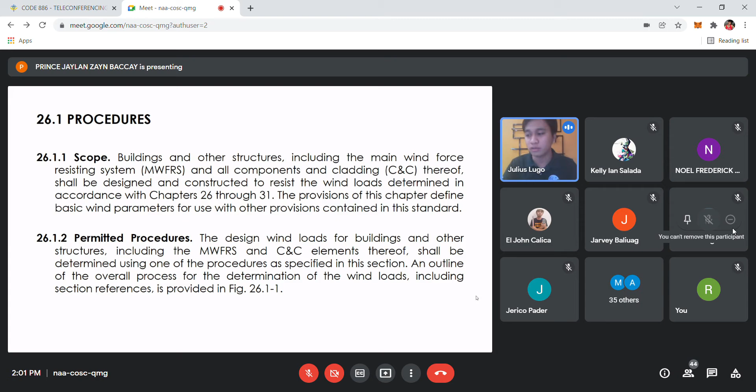So that will be discussed in chapters 26 through 31. So ganun kadami guys, 6 chapters ng ASCE wind loads. So what are the permitted procedures? The design of the wind loads for buildings and other structures, including the MWFRS and C&C, those are the abbreviations, guys, shall be determined using the procedures specified in this section. The general requirements will be discussed in chapter 26, but the specifics of the design will be discussed in chapter 27 hanggang 31. Next slide tayo.

What are the procedures in determining the wind loads for MWFRS? We have actually 4 types of procedure. The first one is directional procedure. Second one is the envelope procedure, and then directional procedure for building appurtenances, and wind tunnel procedure naman for all buildings if it does not fall among the first three that I mentioned. The directional procedure is actually dependent on the height. Actually, lahat naman sila dependent on the height. The directional procedure will be thoroughly discussed in chapter 27, for buildings meeting the requirements specified therein.

And then we have the envelope procedure. This is for low-rise buildings lang. And then we have directional procedure for building appurtenances, or rooftop structures and rooftop equipment and other structures. So the first procedure actually deals with high-rise buildings, the second one, low-rise. The third one is those located on the roof decks. Iba ang analysis nun kasi it's not part of the MWFRS as a whole.

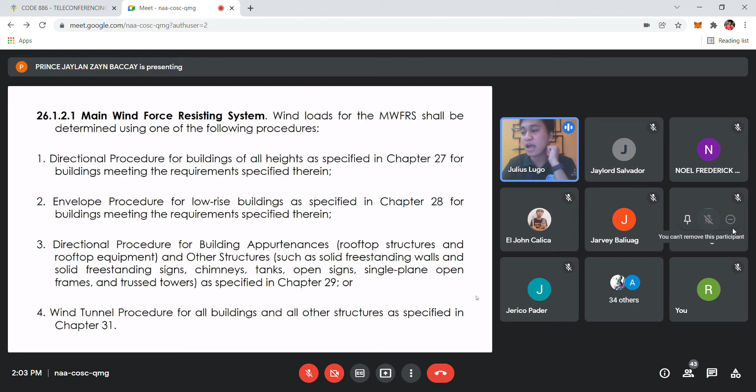For components and cladding naman, next slide tayo, please. Okay. So, for components and cladding, we have two general procedures that we need to do. We have the analytical procedure and wind tunnel procedure naman. But we will not be focusing on the components and cladding. We will just be focusing on the MWFRS.

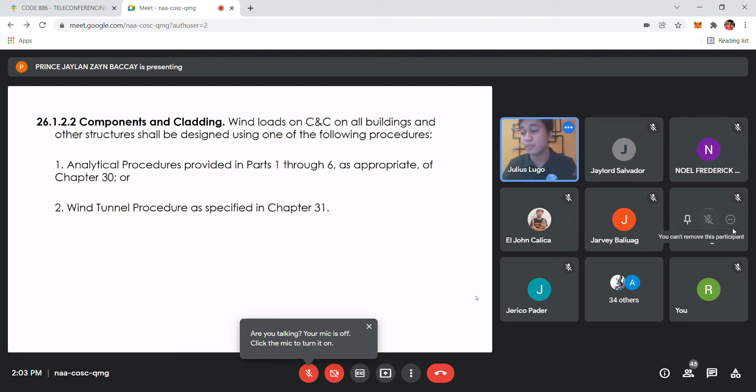Okay, so the first one is analytical procedure, which will be tackled sa chapter 30. Pero hindi na tayo aabot doon kasi we're just focusing on the general requirements. Sobrang dami kasi yun. And then second one is the wind tunnel procedure. Okay. So next slide will be the definitions.

Okay, so I'll just leave that to you kasi sobrang dami ng definitions dito, guys. It is important for you to know the definitions, because upon reaching the general requirements in each section, baka ma-confuse kayo kung ano yung ibig niyang sabihin. So it is required for you to read and understand what these definitions are.

For example, do you know that the definition of a low-rise building depends on the mean roof height? So for building at low-rise, dapat yung mean roof height niya is less than or equal to 18 meters. So the average height of the roof should be 18 meters. That is your low-rise building.

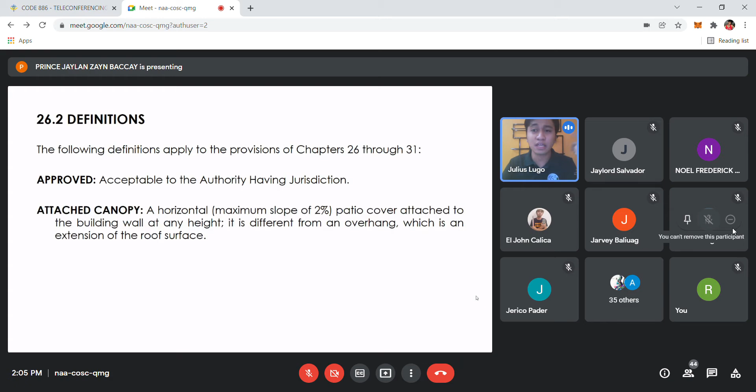And another one is that yung mean roof height mo does not exceed least horizontal dimension. So dapat hindi siya bumaba sa minimum stated by the code, the standard. So, yun yung mga definitions natin. Meron din tayong mga open building, partially enclosed na building, and enclosed. It's up to you na to read that one. Pero nandun na lang yung definition.

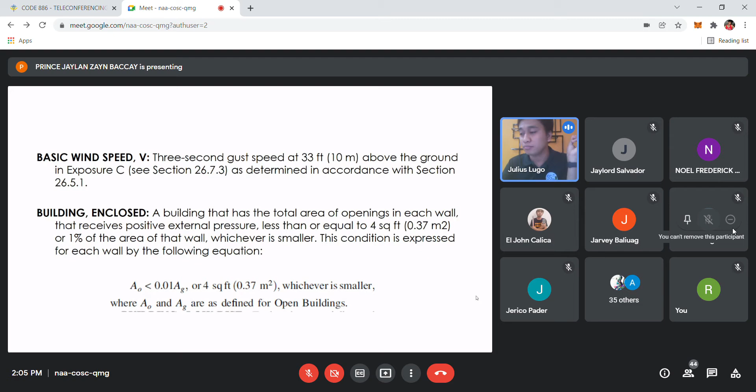What do we mean when we say open building? So, a certain percentage of the building is actually open. It depends on the number or the area of the windows. So, yun yung ating mga definitions. Meron tayo dyan, basic wind speed. Ano ba tong basic wind speed na to? And then building enclosed. So, it's up to you to read that one later on. I will just be talking about the sections na lang.

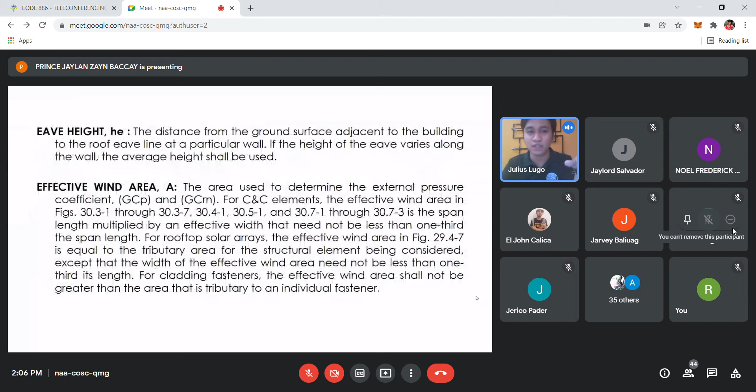So, next chapter po tayo. Hanapin natin yung figure. Ayan, dyan tayo magstay. Balik tayo doon sa may figure. So, this will be the flow of the wind load in general. Chapter 26 of the ASCE talks about the standard values and variables.

Now, for the analysis, Chapter 27, 28, 29, and 31 are actually talking about the procedure on how you're going to apply the wind load. Pero hindi na natin yan gagawin, kasi si STAAD na or yung software na natin ang gagawa niyan. So yung first column on your left side, that's the procedures for the MWFRS. We have 4. And then chapter 30 and 31 naman will be the procedure for components and cladding, the C&C. So yan yung outline ng process natin for determining the wind loads.

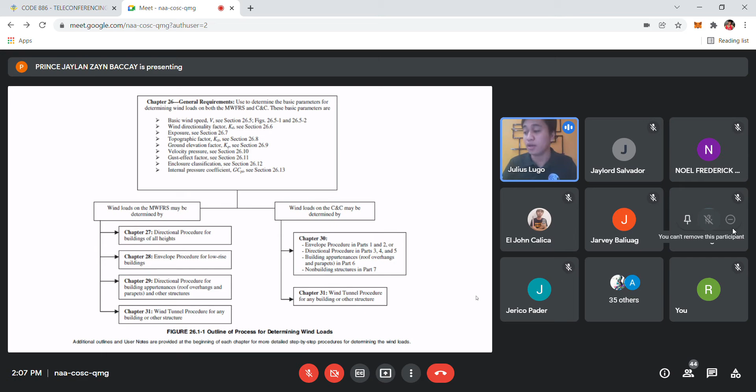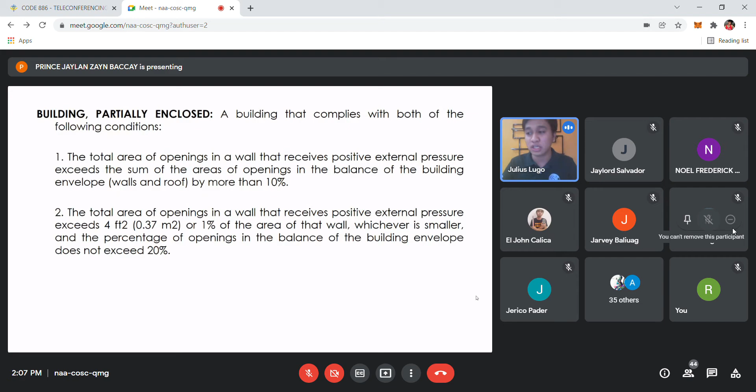Okay, proceed tayo sa 26.4, general. Hanapin mo lang yung general. Sige, baba ka pa. Lagpasan na natin yung mga yan. Balik ka. Ayan. So, ito yung general natin.

General requirements. So for the sign convention, if the pressure of the wind is acting towards the object, it is positive. If it acts away from the object, it is negative. And then critical load condition natin, values of external and internal pressure shall be combined algebraically. So you just need to get the summation of the pressure. Apply lang statics dyan, guys, to get the critical load condition.

If both of them act in the same direction, di ba, you add them. Pero if they are opposing forces, you subtract them. So that's what we call the process of algebraic determination, okay?

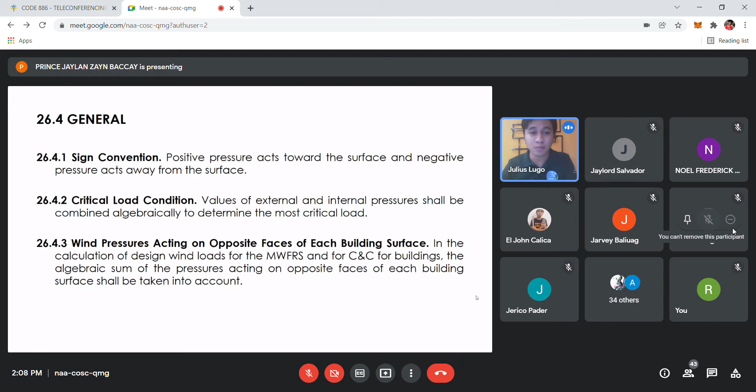Next, we have wind pressures acting on, sige. Sabagay, pareho lang din naman yun, guys, okay? So, doon sa 26.4.3, wind pressures acting on opposite faces, yun lang din yun, okay? You just need to get the algebraic sum, okay? So, proceed tayo doon sa wind hazard map.

So, ano ba itong wind hazard map na ito? Actually, we have that as well. So, dito sa wind hazard map, it is actually a map, literally. It just tells you the average wind speed at that particular area, using parang contour lines, guys, okay? Later on, meron tayong sample niyan. I think next slides will have the example.

Pero dito sa basic wind speed, how do we determine this one? So for basic wind speed, guys, that's the V. Tandaan, basic wind speed is the V. We use this in the determination of the wind load and other structures. We can identify these using figures 26.5-1 and 26.5-2, and then to identify as well the risk category of the building, okay.

So if your structure is under risk category 1, you use figure 26.5-1A and 26.5-2A. Now, similarly, if it is under category 2, you use 26.5-1B and 26.5-2B, and so on and so forth. So the values of your basic wind speed depend on the risk category, okay? And the wind shall be assumed to come from any horizontal direction.

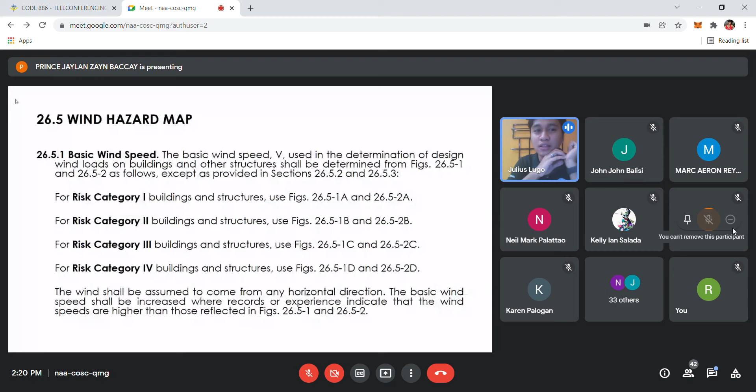Earlier, I mentioned that the values of the wind speed, the V, is actually taken from the code, or given by the code. But in this instance, because of climate changes and changes in environmental phenomena, the basic wind speed is not standard. It can go higher, it can go lower. So what are we going to do? We need to consult the experts, the regional climatic data, for example PAGASA, to check on the basic wind speeds of that particular place.

For example, with Yolanda, we only had signal number 4. But because of what happened with hurricanes, wind speeds became above normal, above our standard of 250 kilometers per hour - even more than that. I'm not totally sure, but because of that, we had changes in the code. They increased the values of our wind speeds, including the gust factors.

We also have mountainous terrain. The basic wind speed for mountainous terrains, gorges, and special wind regions shown in figure 26.5-1 shall be examined for unusual wind conditions. So if your place has a value for wind speed, it doesn't mean that's your actual wind speed at that particular area, especially if you are in mountainous terrain.

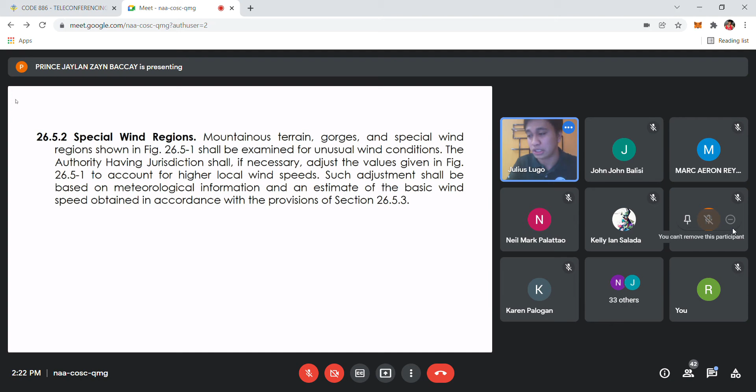Next, we have estimation of basic wind speeds from regional climatic data. This is what I mentioned before - that the wind speeds actually depend on your design and the updates. So we have modifications or estimation of the basic wind speeds.

These are necessary first when approved extreme value statistical analysis procedures have been used in reducing the data. So we are not the ones who do the estimation of basic wind speeds - that's the bottom line here. We don't do that, unless you are a wind engineer specializing in wind engineering.

Another point is the estimation is acceptable if the length of record or sampling error, averaging time, anemometer height, data quality, and terrain exposure of anemometer have been taken into account. Of course, we will do experiments in the field, especially if you are in a mountain. You can't just use one anemometer - there will be sampling points, a lot of sampling points. The more sample points you have, the more accurate the data is. So those are the two conditions in estimation of basic wind speed.

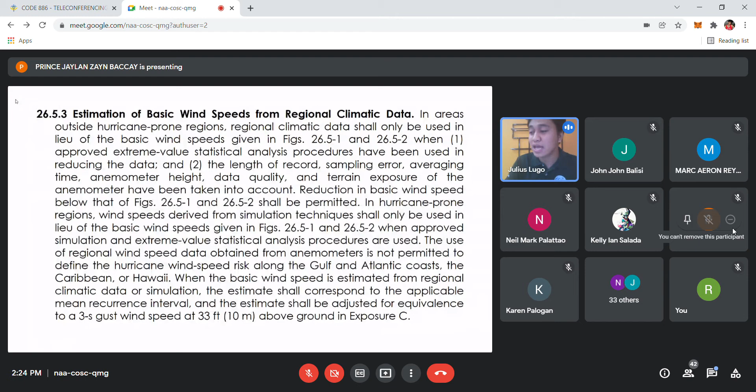Next, this is now the climatic wind map. As you can see, we have curves there, and those curves actually tell you the average wind speed at that area. I think this is Alaska, and this is the east coast of USA. Since we're using the ASCE standard, we may not relate to that directly, but we also have a wind map in the NSCP.

We don't have it because the problem at our school is they don't have an NSCP e-file. And it's sold, worth about 2,000 pesos, and they can't even provide us with the authentic copy. That's why we use ASCE.

Anyway, the curves there indicate uniform wind speed along that path. So if your place falls on that curve, that is your wind speed. But what if your location falls between two separate contour lines? Let's just call them contour lines - it's similar to your topographic map.

So if it falls between two contours, do we get the average of the two, and that becomes your wind speed? Highest, sir? Yes - we need to choose between the two, whichever is the highest. We don't do averaging, rather we choose the highest one, if it is between those two contour lines.

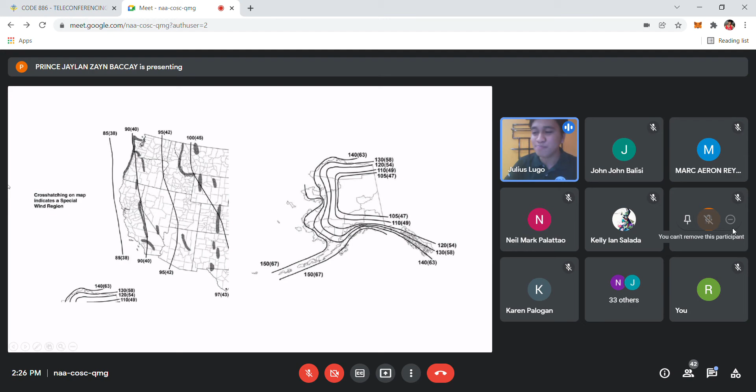There are notes on the next slide about the wind map. So, next slide, dear Prince. Those are the notes - read them later on.

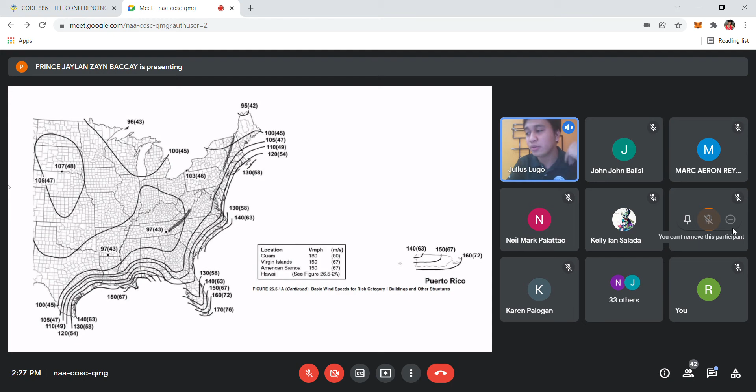So next, we have the wind directionality factor. The wind directionality factor takes into consideration the direction of the wind. Is it from the east side, the west side, the northern side, or the southern side, or is it on the facade of the building? Is it at the rear portion of the building? We need to take into consideration the wind direction.

So these are the wind directionality factors. We have KD, and then we have the building or the structure type. Since no one is probably going to design an arched roof or circular dome here, let's just stick to the box type building.

So what we're going to use as the directionality factor is 0.85, because we are doing MWFRS analysis. We won't be doing components and cladding. So 0.85 for us. Now, your directionality factor can be 0.95.

Those are only for round or octagonal structures with non-axis symmetric structural systems. When we say non-axis symmetric, it's not the same on both sides. If you're going to cut the structure into two, are they the same structural system? Are they the same shape? Do they have the same structural characteristics whatsoever?

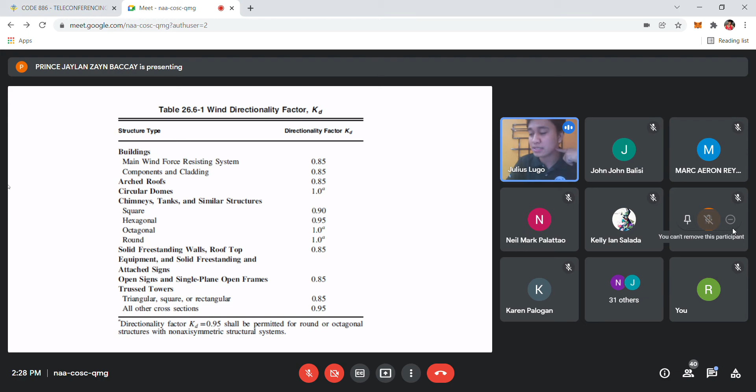So proceed to the next slide. So we have the wind directionality. The wind directionality factor, KD, shall be determined from Table 26.6-1. I think that's the table from earlier, and shall be included in the wind loads calculated in chapters 27 to 30.

And the effect of wind directionality in determining wind loads in accordance with chapter 31 shall be based on... in accordance with chapter 31. But we won't be reaching chapter 31. Okay, next.

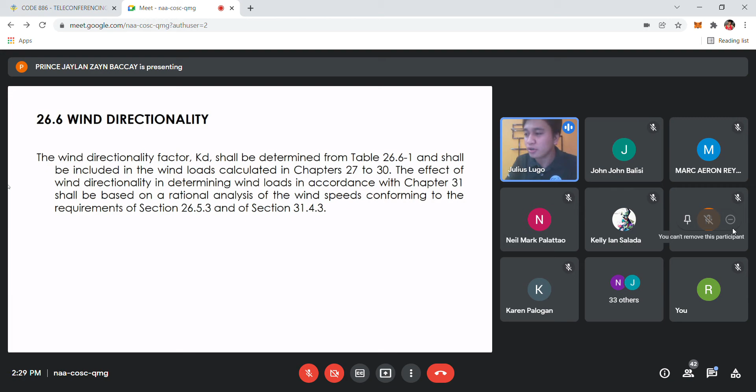Exposure. So we have exposure as well. What do we mean when we say exposure? Of course, we cannot just consider the direction of the wind, but rather we need to consider how close the building is, since structures around the building have an effect. They obstruct the wind path. That's why we have exposure sections here.

So for each wind direction considered, the upwind exposure shall be based on ground surface roughness that is determined from natural topography, vegetation, and constructed facilities. So that is your exposure.

Now your wind directions and sectors for each selected wind direction at which the wind loads are to be determined, it is up to you guys. And in the analysis later on, front, back, and the opposite side, that's what we'll consider as our wind direction.

Now we need to consider upwind sectors extending 45 degrees on either side of the selected direction. Of course, in the case of horizontal, the assumption is horizontal. But we need also to consider at least 45 degrees from the horizontal wind directions. Normally, the assumption for wind is just a single gust in a straight line, but it's not, because when it actually blows, a gust of wind goes in different directions. That's why instead of just horizontal, we also consider 45 degrees upward and downward from the horizontal. So that's the basic scheme of our analysis for the wind directions.

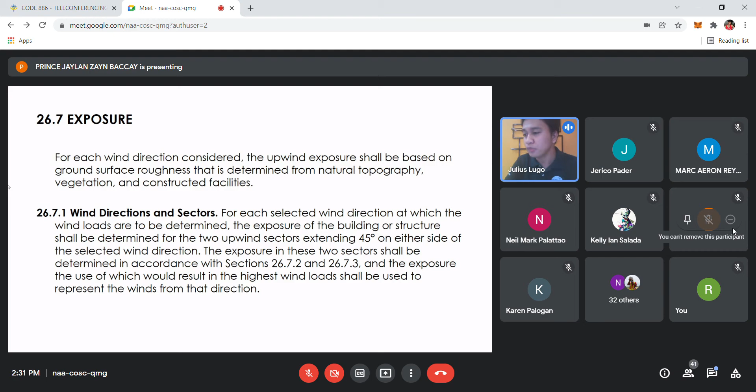So we have exposure types later on, but right now we're going to consider surface roughness categories. What are these surface roughness categories? From the word itself, it's surface roughness, kind of textural - on a massive scale it's textural because we're considering the obstructions. So we have different types of surface roughness here.

We have surface roughness B, C, and D. We don't have surface roughness A. For surface roughness B, just identify all surfaces or places that are urban and suburban areas, wooded areas, or other terrain with numerous closely spaced obstructions. That is surface roughness B.

For surface roughness C, these are open terrains, but they also have obstructions, generally averaging less than 9.1 meters. That's surface roughness C.

Now for surface roughness D, these are flat and unobstructed areas. Normally in our profession, we use surface roughness D because it's more conservative in terms of the design. Where do we find surface roughness D? Well guys, fun fact - normally it's our coastal constructions.

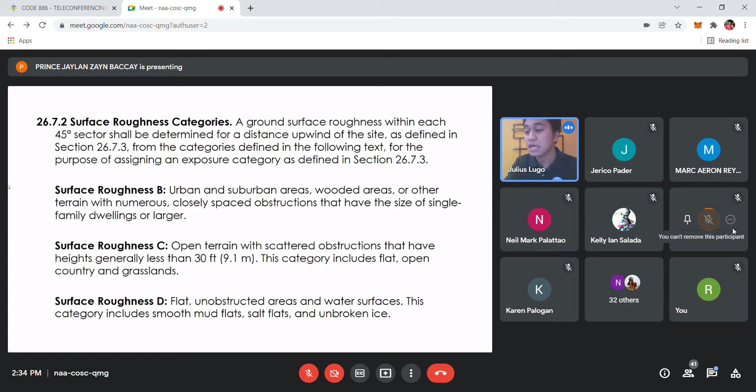Next, we have 26.7.3. Next slide po. These are the exposure categories. Actually, yung exposure C dyan, guys, or yung exposure B dun sa baba, kadugtong niya yan nung under sa exposure C. So, i-edit ko na lang yan later on and i-upload ko na lang.

Okay? So, for exposure B, for buildings or other structures with a mean roof height less than or equal to 30 feet, exposure B shall apply where the ground surface roughness as defined by surface roughness B prevails in the upwind direction for a distance greater than 1,500 feet or 457 meters. Okay.

Now, exposure B actually can be used, okay, ito na yung exposure categories. Kasi kanina yung na-discuss is the surface roughness categories. Now, the exposure will depend on the surface roughness. Okay, so if your surface roughness is under category B, you should use exposure B.

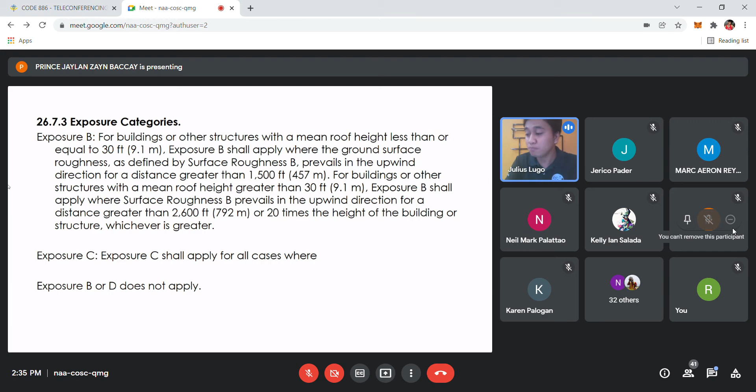Okay, wherein exposure C naman applies for all cases where exposure B and D does not apply. Okay? So, to simplify, exposure C applies only to surface roughness categories under C. So, surface roughness B will just be paired with exposure B, and then surface roughness C will just be paired with exposure C. Okay? So, yun yung mga exposures natin.

So, next one will be exposure D. Ano ba yung exposure D in here? Sabi dito, exposure D shall apply where the ground surface roughness as defined by surface roughness D naman. Kumbaga, the surface roughness is paired with their corresponding exposure. So, B is to B, C is to C, and then D is to D.

So yan lang naman yung idea behind the exposures. So whatever is your surface roughness, that will be the exposure. Surface roughness B, that's exposure B. Surface roughness C will just be under exposure C, and then roughness D will just be under exposure D. Okay, so yun yung ating exposure requirements. Wherein meron tayong exemption naman.

Okay, so an intermediate exposure between the preceding categories is permitted in a transition zone, provided that it is determined by a rational analysis method defined in recognized literature. So that's the only exception. So what if the categories under exposures are borderline? Kumbaga in between exposures and roughness lang sila. Which rarely happens in practice.

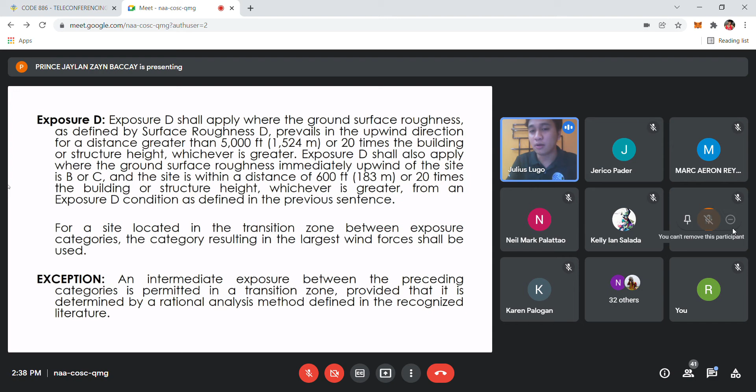So ang ginagawa is that there will be further studies based on published literature, and that's not under the control of the engineer anymore, but rather it will be under the guidance of the agency concerned with the climatic data. So yun yung exemption natin doon. So ang final say will be the agency concerned. Okay. So next we have the exposure requirements.

Good. Alam mo, iniisip ko yung substi na yan. Okay, medyo na-distract ako dun sa substi.

So we have exposure requirements as well. So directional, we have the 4 procedures again. What are the 4 procedures earlier for the MWFRS system? Do you still remember? Okay, let's try to call someone. Si Jarvey. Jarvey, do you still remember the 4 procedures involved in the analysis of the wind load for MWFRS system?

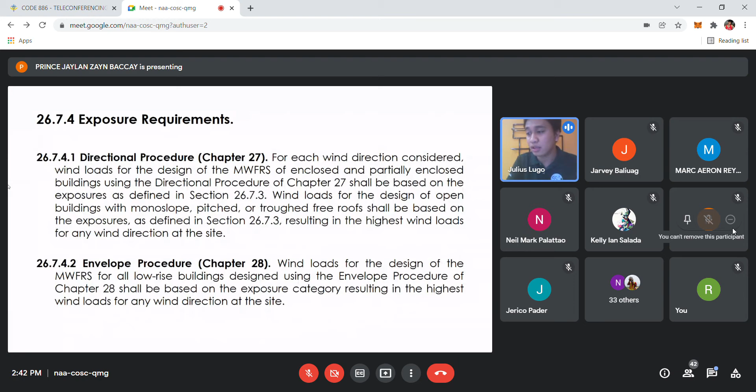Now in the next slide, it says for directional procedure for building appurtenances, yung ating exposure will depend on the appropriate exposure for each wind direction considered. So yung first two kanina, regardless of the direction, you have to choose kung ano yung magandang exposure. Sa first procedure, directional, yung sections ng 26.7.3 yung gagamitin. Sa envelope procedure, whichever gives the highest value, in general, whichever direction it is, yun yung gagamitin.

Now, in directional procedure, you have to consider the direction of the wind. So, it depends on each particular face, kunyari four-sided yung building mo. Mag-base ka sa 26.7.3 pero yung application ng loading will be in each face. So, yung mga exposures kanina, isa lang siya. Yung first two will be in general. Pero ito, whichever is more appropriate in that particular face depending on the wind direction, yun yung gagamitin mo.

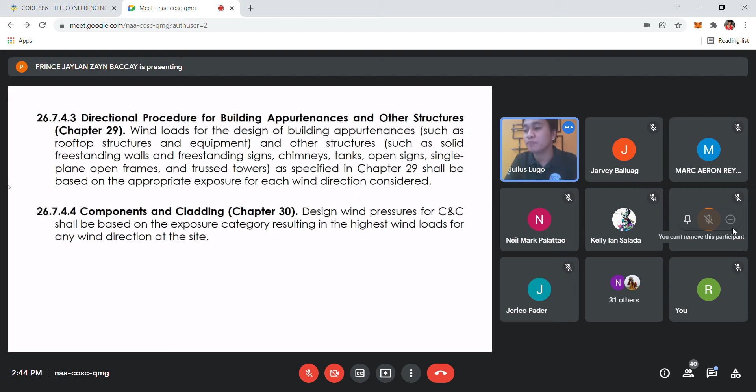So, sa components and cladding naman, that will just be similar to the second procedure, pero C&C na siya. Similar lang siya sa envelope procedure. Pero yung second procedure kanina, that's for the MWFRS lang. Ito, components and cladding naman, whichever exposure type and roughness type will give you the most critical loading, yun yung gagamitin. Next, we have topographic effects.

Wait lang, pwede bang uminom muna? Inom muna ako, nag-dry yung lalamunan ko. So, wait lang guys. Ayan. And can I take a moment to go to the bathroom? Bathroom break lang ako saglit.

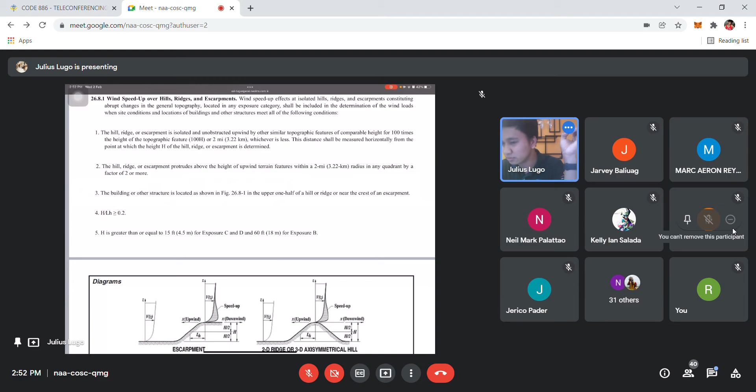Oh, by the way, meron palang figure dito. Let me stop broadcasting. Meron palang figure dyan, sorry. Meron tayong figure doon, Prince. Pwedeng pa-share ako ulit. It's in the next slide pala. Prince, pa-share na lang ako nung screen mo. Ayan, thank you.

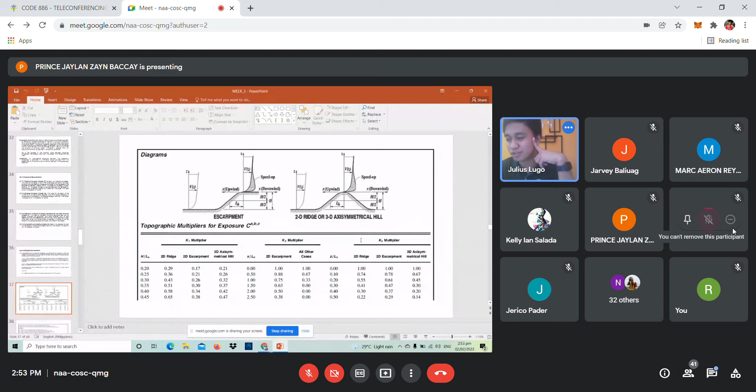Yung instructor sa foundation engineering, ano ba yan? 3 lang tayo kasi hindi tayo nag-discuss ng first week, di ba? So wala pa pala kayong instructor. Oh my God. Paano yan? Midterm na lang kayo mag-start mag-discuss. Diyos ko. Tagal kasi mag-approve ng HR, tsaka VP admin.

So, meron tayo dito, escarpment na tinatawag. As you can see, that is your escarpment on the left side, and then yung ridge naman natin is this one. Yung escarpment natin, elevated siya and then continuous na yung kanyang level. Pero yung ridge or hill, parang nagbukol siya, and then there is a change in slope and then it goes back to the original level.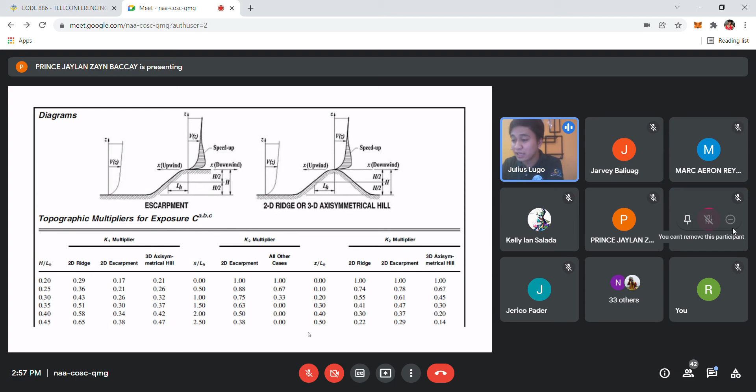Now, ito yung multiplier natin, K1, K2, mga ganyan, okay? So, check nyo lang later on, that is tabular in nature naman. Now, on the next slide, meron tayong additional reminders. So, meron tayo dito for values of H over LH, mga ganyan. Kung wala doon sa table, you can do a linear interpolation.

Do you guys know how to do a linear interpolation? No? Okay. If you are given two values and you're looking for a value in between those two values, pwede tayong gumawa ng algebraic expression. That's just upper value minus lower value all over variable up minus variable down, should be equal to the unknown value minus the lower value all over the variable of the unknown value minus the variable of the lower value. So that's a linear interpolation.

Kumbaga mag-ratio and proportion ka lang guys. So magma-minus-minus ka lang, and then kunin mo lang yung ratio nila. Parang slope siya guys, slope between 2 points. So kapag linear ang nature ng equation, whatever point between those 2 points lying in the line connecting them, yun din yung slope ng point na yun. So whatever the slope of the general equation, that's also the slope of values in between those 2 points. So I hope you know how to interpolate.

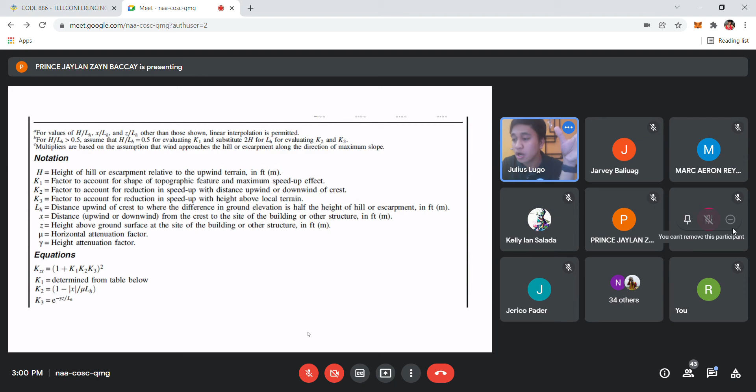Next slide po tayo. So, in here you have 26.8.2, that's just the topographic factor. Pero if site conditions and locations of buildings and other structures do not meet all the conditions specified in 26.8.1, then KZT is taken as equal to 1. So, titingin kayo doon sa 26.8.1. There are actually 5 conditions there. Pero pag hindi nyo na-meet, you can just use KZT as 1.

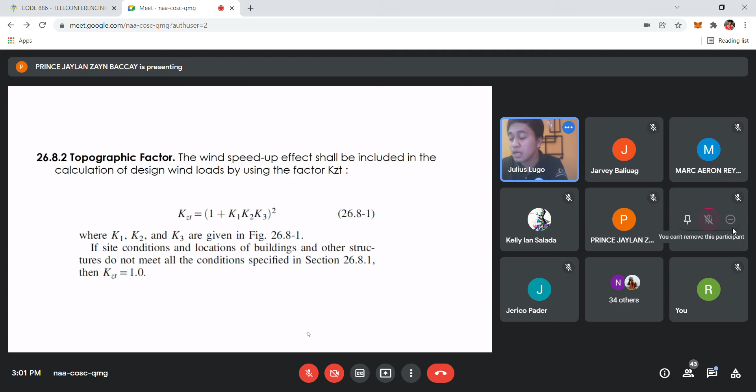Next, ground elevation factor naman tayo, 26.9. Ito, used for adjustments lang of air density. So, yung KE natin is permitted to be taken as 1. Pero, if specified by the code, gagamit tayo ng table 26.9-1 to identify your KE. I think I put the KE table in here.

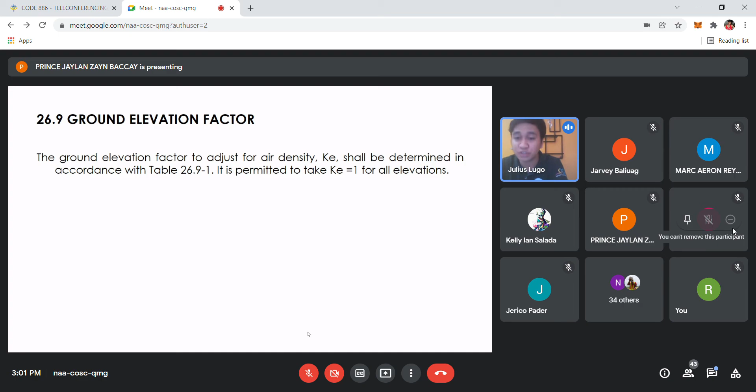Okay, so next slide will be the velocity pressure exposure coefficient. So ito yung KZ or KH natin. Lahat ng applicable values will depend on table 26.10-1. For sites naman located in a transition zone or borderline ng dalawang exposure categories, intermediate values for KZ or KH between those shown in 26.10-1 are permitted, provided that they are determined by rational analysis, a method defined in the recognized literature.

So normally, if borderline siya between exposures, lies in between 2 exposures, rational analysis na po yun. It's actually not us who's going to determine the value of the KZ or the KH, but it will be the experts on the field na. So, hindi na tayo babablahin. Pero I think there are some exceptions again in the values of the KZ and KH later on.

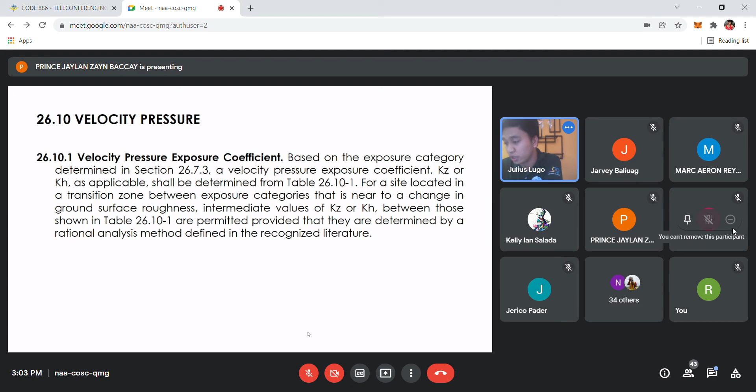So, next slide tayo, we have ground elevation factor, KE. Ito na yun guys. Yung KE ninyo, pili kayo dyan, depende kung ano yung elevation ng inyong site above sea level. So in here we have less than 0, 0, 1,000, 2,000, ganyan, in terms of feet, pero in meters, ayan siya. And then yung corresponding ground elevation factor niya. So, what if in between siya ng 1,000 and 2,000? Can you try? Do you have your calculators with you?

Do you have your calculators with you, guys? None? Okay. Let's try to interpolate this one. What if the value of the ground elevation is between 305 and 610? What if it's 625? Rather, it's 450. What if 450?

If you're going to do an interpolation, what will be your value? Can someone try, and let's see if the value is the same as mine? 450 is what we're looking for. Okay, what are your values? Mine takes long to solve because I used shift solve. So, by linear interpolation.

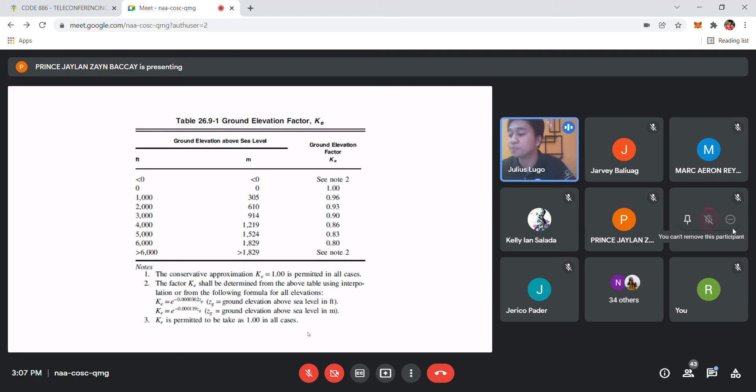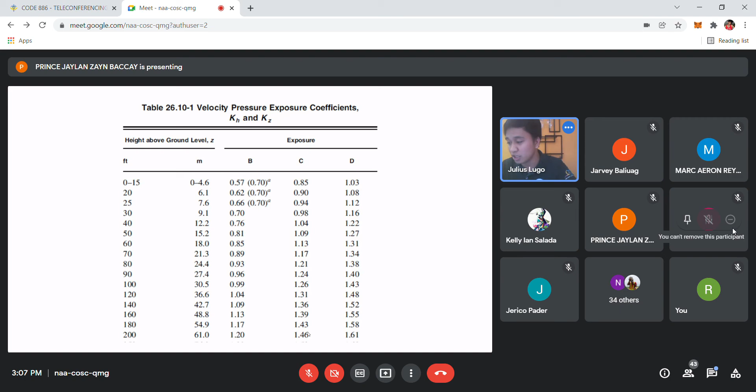Next is the table, velocity pressure exposure coefficient. We just choose here the height of our building above ground level. So those are our KZ and KH, the exposure coefficients. Next, here we have annotations at the bottom of the table. Use 0.7 in chapter 28 for exposure B when z is less than 30 feet. That's the height of the building.

Use 0.7 in chapter 28. I think chapter 28 is actually the envelope procedure. The envelope procedure will be discussed in chapter 28. So our exposure coefficient is determined from the following formula. If z is less than 15 feet, Kz is equal to 2.01 times 15 over zg to the 2 over alpha.

Then the determination of alpha. So alpha and zg are given in table 26.11-1. You're going to use the formula or interpolation. Exposure categories are defined in section 26.7. So it's really about finding provisions and how you're going to calculate. Next, velocity pressure.

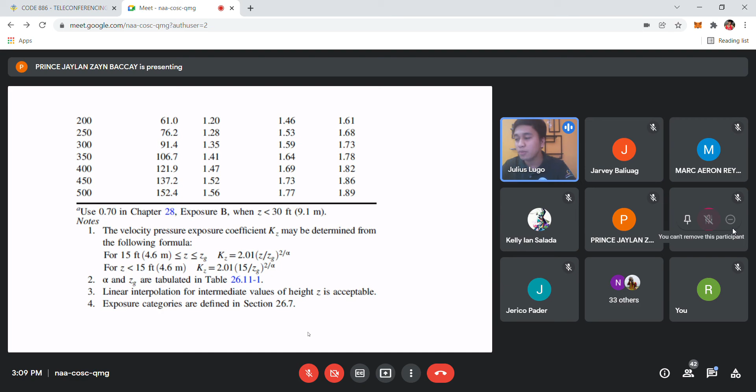So here is the formula for your velocity pressure. QZ is the velocity pressure, defined by 0.613. They don't say how they derived constants like that. As explained earlier in our week 1 discussion, the code doesn't say how they came up with that particular value. What they mention is that it's determined through observation or the empirical method. So, more about concepts.

Now, use 26.10-1.si because it's in SI units, meters per second. Mixing units will invalidate your answers, so if you're using SI, use the SI formula. Okay?

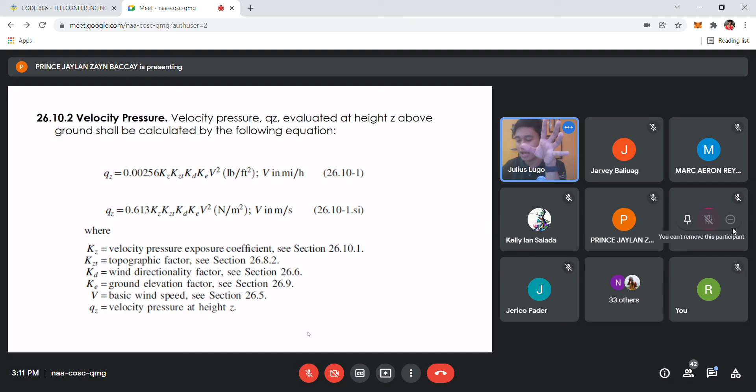The velocity pressure at mean roof height is computed as QH equals QZ from equation 26.10-1, that's the previous equation we just mentioned in the previous slide. So your QH is equal to your QZ.

Whichever applies to this section, belonging to the velocity pressure calculation.

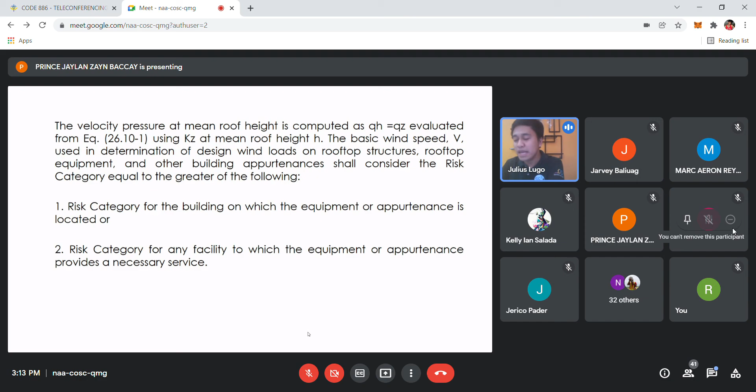Next, we have section 26.11. We need to have the concept. In general, we can consider the gust-effect factor as 0.85, that's the generally acceptable value, 0.85.

Now we can consider, but the condition is that we have to modify the gust-effect factor. So what happens is that formula, in general you can use 0.85 as the factor.

Then we have the determination. To determine whether the building is rigid or flexible, we use section 26.2. This is required for the capability analysis, whether rigid or flexible. When we say rigid, even without a strict definition, and flexible likewise has no exact definition, it's not really just a single circumstance.

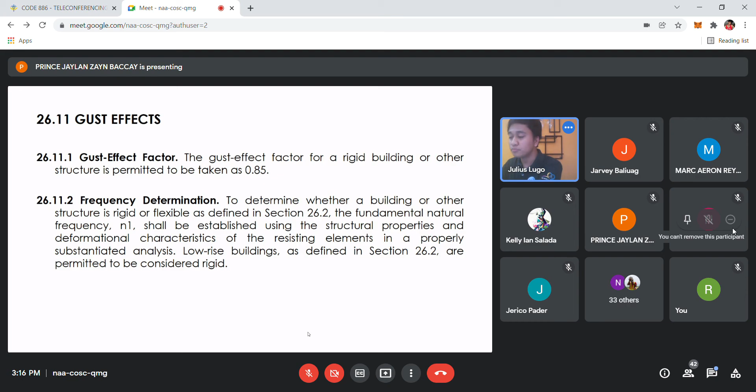Now, next slide, what's the relationship with our approximate natural frequency? The alternative for performing the analysis of the natural frequency of the building is that we can approximate it, but there are requirements for the approximation.

First line is building height, and the second one is also building height. But in the first line, building height is less than 91 meters, and the second one, less than 4 times its effective length.

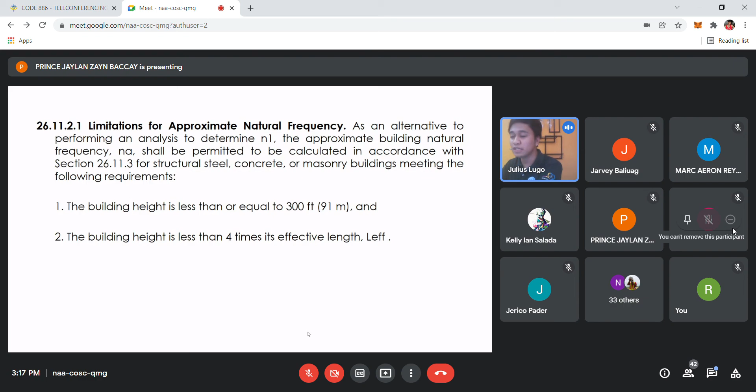Effective length is further discussed in the next slide. So how do you determine the effective length? We just use this formula, the ratio between the summation of your HI and LI from 1 to n, all over the summation of your HI from 1 to n.

So what is HI? That's the height above the grade of the level. And LI is the building length at level I, parallel to the wind direction.

At level I, it could be that you only have a single story, so that's only one level. For 2-story, that's 2 levels, 3-story, and so on. That will be your building level, whatever is the length of the structure parallel to the direction of the wind. That's how you get your Li. So your L-effective, that's how you compute the effective length.

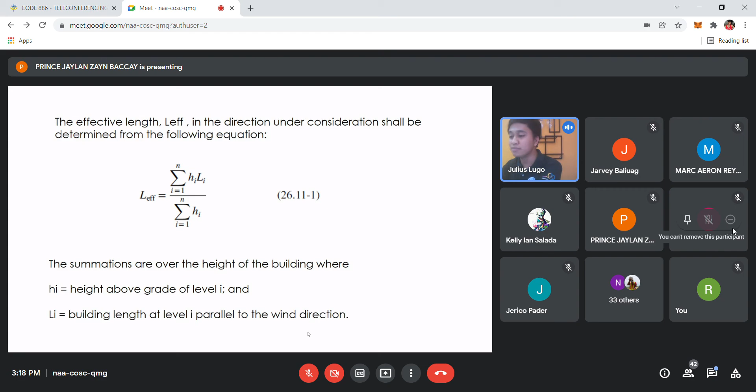Next slide, approximate natural frequency. We have an approximation of natural frequency. This is how we're going to compute the natural frequency of the building. In the next slide we have the formula.

First we have to determine if the building is actually structural steel, reinforced concrete, or a combination of the two. In the next slide you'll see the formula to use. For structural steel, the first formula is na equals 22.2 over H raised to 0.8, something like that. It depends on what the moment resisting frame is, whether structural steel or concrete. There's also a combination of the two, structural steel and concrete, and also concrete or masonry.

What is masonry, guys? What is masonry? Anyone, what is masonry? What's the difference between concrete and masonry?

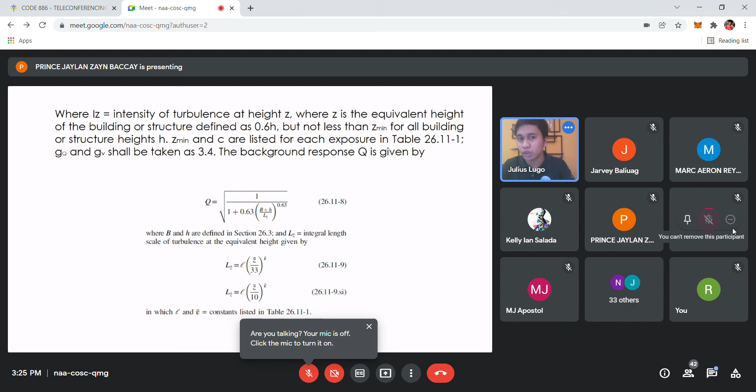Next slide. So earlier we discussed rigid structures, where you determine the gust effect directly. So what if we have a flexible structure? Your G now will be different from the value of your G in comparison to the rigid one.

So if the problem states that it is a flexible or dynamically sensitive building, the GF formula is this one. Similar to the rigid case, your GQ and GV shall be taken as 3.4.

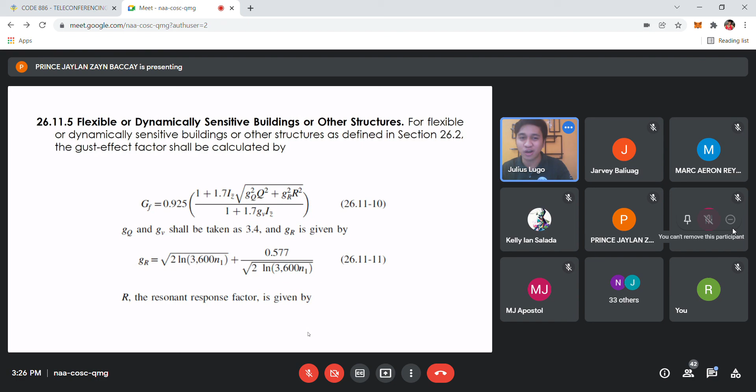Next please. We're about to finish. I'm trying as much as I can to finish this before time's up. Hopefully we can finish it. Anyway, this is just the point.

So again, guys, your resonant response factor, it's 1 over beta, something like that.

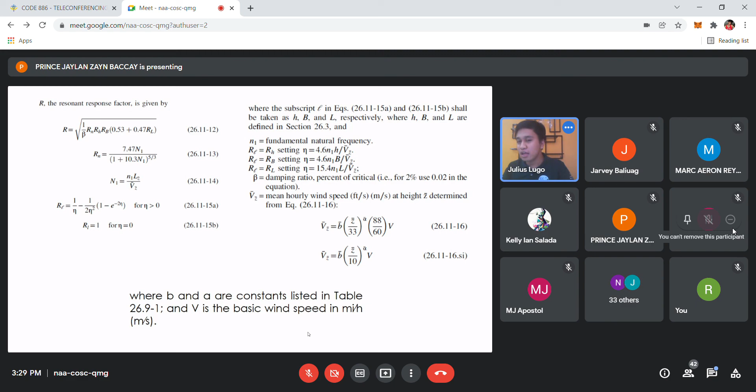And then we have, next slide, rational analysis. So we have the rational analysis. It will be used to determine other gust effect factors other than those stipulated in sections 26.11.4 and 26.11.5.

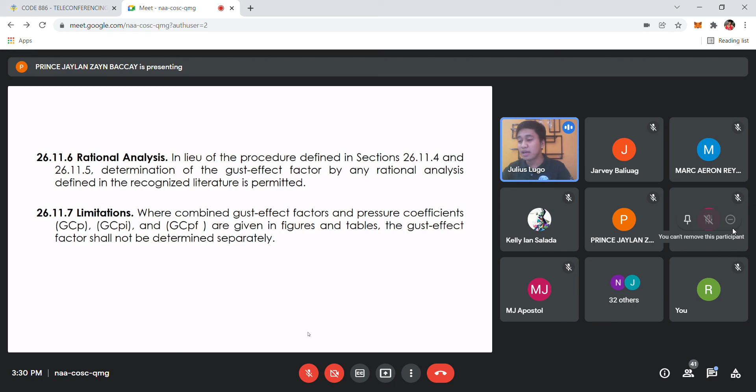So we also have limitations. We have what's called combined gust effect factors and pressure coefficients. Our pressure coefficients are GCP, GCPI, and GCPF.

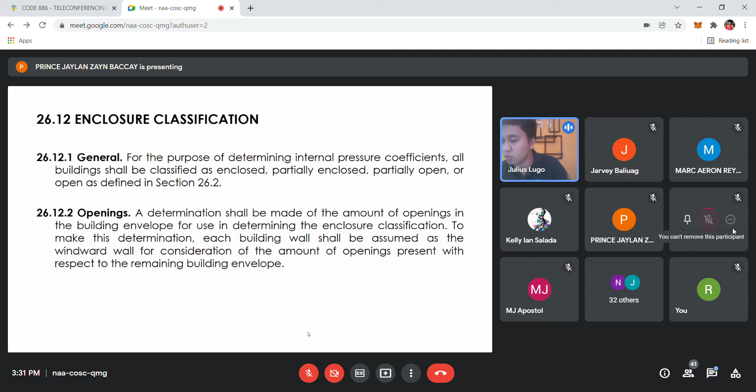Now let's proceed to the next slide - protection of glazed openings. What are these glazed openings?

These glazed openings actually pertain to your windows, something like that - windows that are too exposed. So there's a need for you to protect your glazed openings.

Anyway, the glazed openings will be further discussed, because the provisions for glazed openings here are just general. But for you to understand it better, you have to actually read the ASTM book. But in our case, we won't consider the ASTM, so we can just skip the glazed openings, guys.

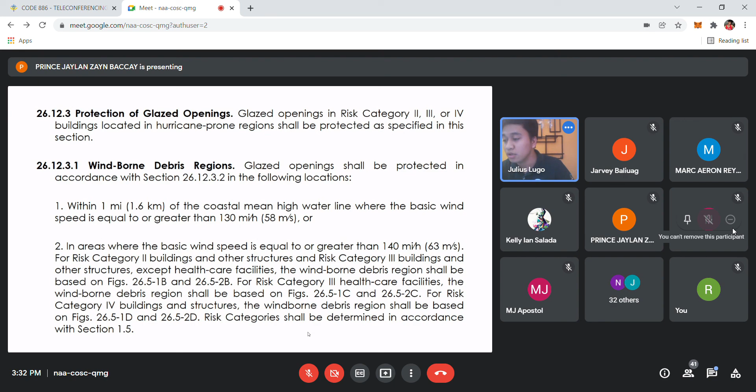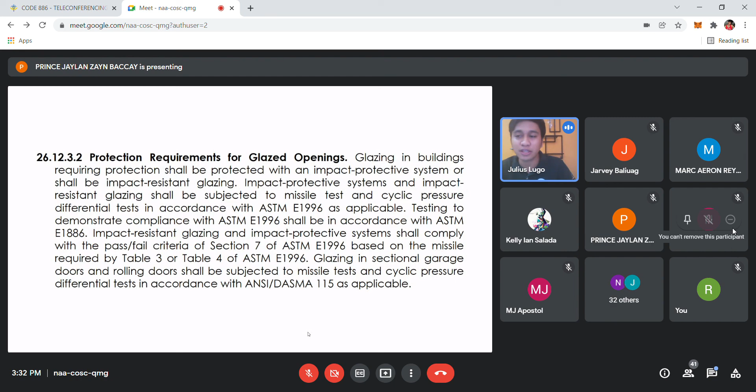Okay. So kahit i-skip na natin yan. Punta na lang tayo sa table 26.13-1. Ayan guys yung mga protection requirements natin. Okay, so kahit wala tayong magganyan kasi wala naman natin i-consider yung glazed openings later on sa design. Okay, kasi magko-consult pa tayo ng ASTM. I don't think so. Ang hirap na intindihin ng code eh. Okay, so ito yung mga values natin for GCPI, guys.

Okay, so what will be the enclosure classification? We have to determine the enclosure classification. So in here, in the table, mayroon tayong criteria for the enclosure classification. First one is enclosed buildings. If the area of the opening is less than the smaller of 0.01 Ag, or 4 square feet, or 0.37 square meters, and AOi over AGi less than or equal to 0.2.

So you have to check first the criteria, okay? Kung saan magpo-fall yung classification ng enclosure ninyo. So we have enclosed buildings, partially enclosed buildings, partially open buildings, and then we have open buildings. So how are you going to check the enclosure classification? You just stick to the criteria of each respective enclosure.

So yung AO dyan, that's the area of the opening of the building that includes all the doors and the windows, mga ganyan. And then yung AG naman, that's the gross area of the building itself, the face of the building. Okay, so yung gross area na yun, including yung area ng butas. So the area of the face or the side of that building, that is the AG. Okay, so identify nyo lang kung anong classification.

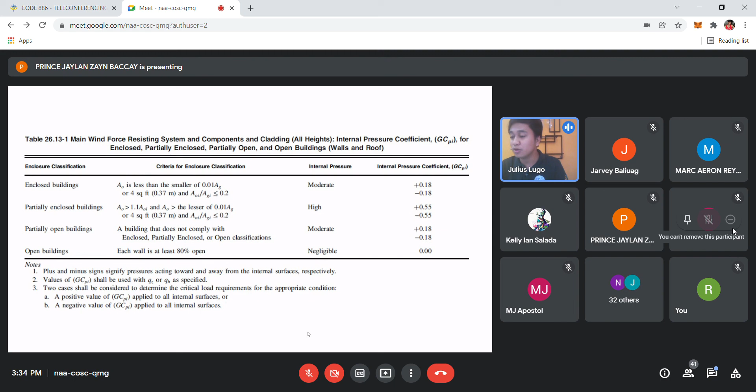So other testing methods and performance criteria are permitted to be used when approved. Okay, so we have glazing and impact protective systems in buildings and other structures classified as risk category 4 in accordance with section 1.5 shall comply with the enhanced protection requirements of table 3 of ASTM E1996. Okay, so wag na tayo mag-ASTM, guys.

So what if we have multiple classifications of buildings? Well, if the building definition complies with both open and partially enclosed definitions, it shall be classified as an open building. Pag nag-fall siya in between open and partially enclosed, you're just going to put there open. Okay. So, ika-classify nyo na siya as open if it fell between open and partially enclosed. You just use open building na lang. Okay?

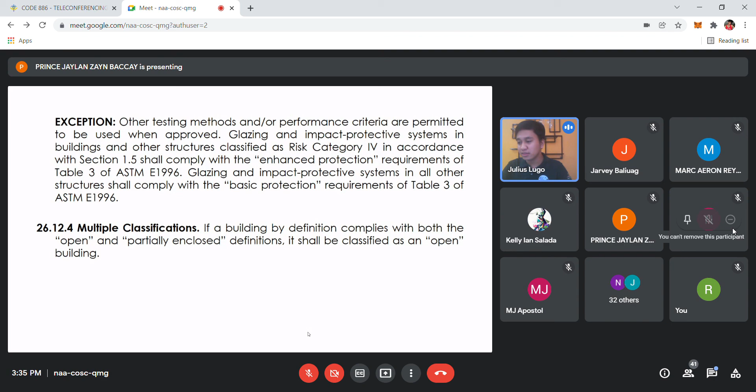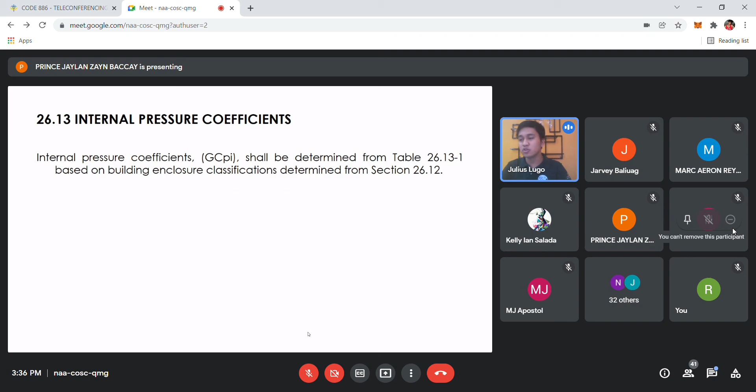So next is yung internal pressure coefficients natin. Internal pressure coefficient or the GCPI shall be determined from table 26.13-1 based on the building enclosure classification determined from section 26.12. Okay, and then we can also use reduction factors, guys, in terms of the GCpi.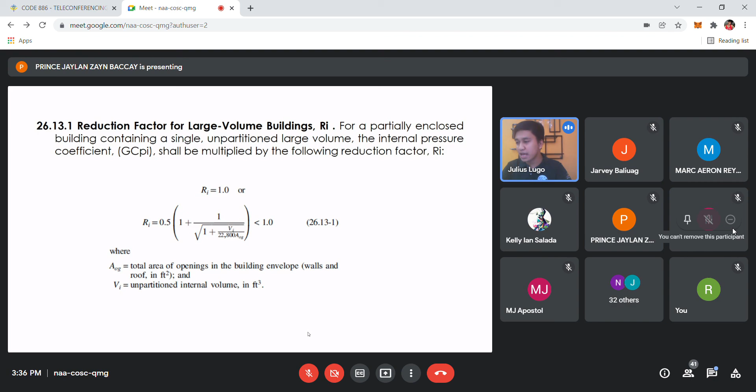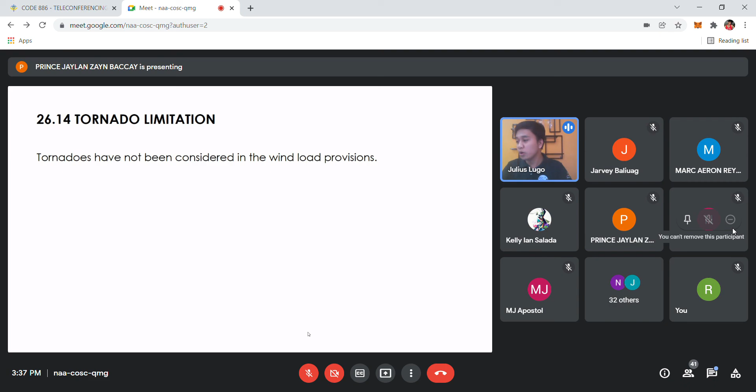And the last slide will be tornado limitation. So, in the wind loads, ang tornado po, it's not considered as the wind load, but rather, it's considered as a live load. And it is basically under the impact loadings. So, yun lang yung sa provisions ng tornadoes. So, that ends our week 3 discussion.

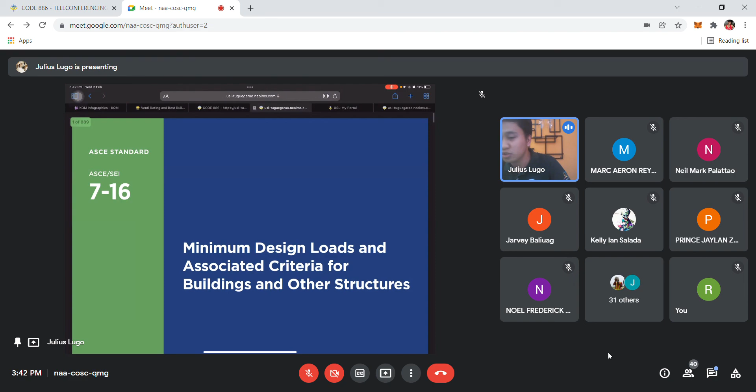Now, next thing is in terms of the references, okay? If I were you, you try to download this one. ASCE 7-16. Sobrang laki nito, guys. I think it's 62 point something MB. Okay? So, pero kaya nyo naman siyang i-download siguro. And then, dyan kasi guys, yung mga lectures natin. Lahat ng lectures ko is actually nandito na siya sa ASCE 7-16. Ito siya. Minimum Design Loads and Associated Criteria for Buildings and Other Structures.

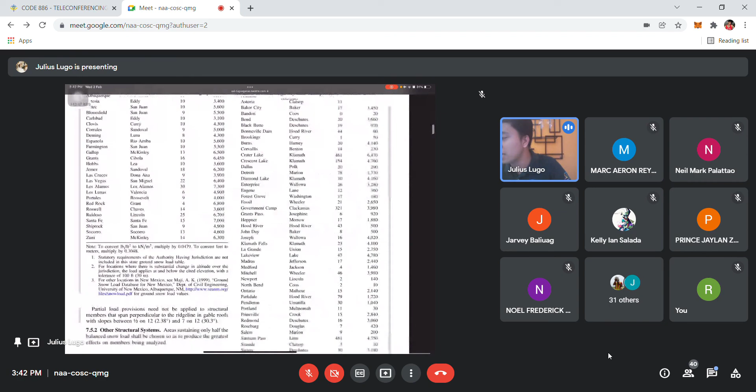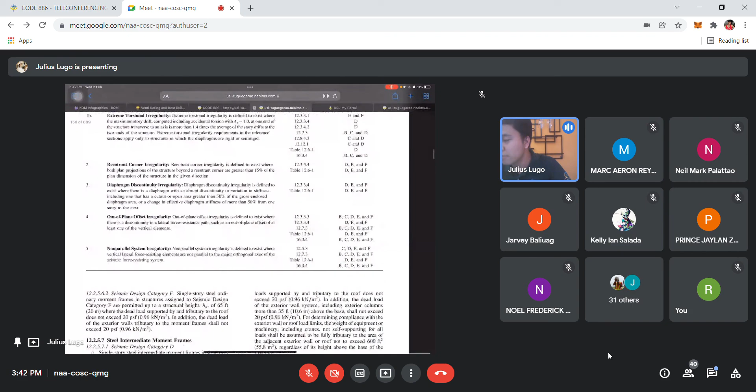So, I require you to download this one so that you will have a copy of the tables. Kasi hindi ko na nilagay lahat ng tables dun sa mismong PowerPoint, kasi sobrang hahaba ng tables, guys. Now, I require you to download this one so that later on your quiz and your exam, wala kayong problema maghanap-hanap ng section. So your quiz and exam will be objective type and some of it meron siyang computation, pero hindi naman siya ganun complicated. So, i-apply nyo lang yung mga formula sa code natin. So, questions, clarifications, wala na.